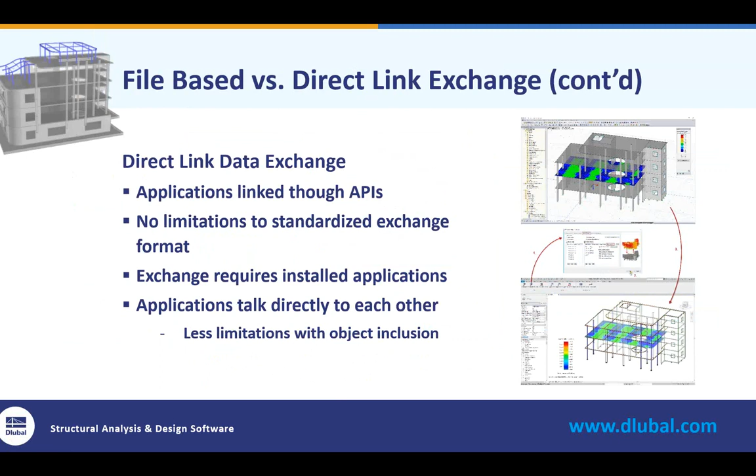With this option, the applications talk directly to each other. So with this, we're going to see a lot less limitations with object inclusion. So back to my previous example with nonlinear supports and load combinations, well, now we can just code in the option through the API interface to keep this information available. So whether we're round tripping between the programs, we'll never lose that information, even if it isn't necessarily included in the program that we're interfacing with.

So this leads us to the Dlubal Revit link and the import-export options available. So I want to first note that this does utilize direct integration with API. So again, we're going to see a lot less data loss than when we're creating a data file format. This option is included in RFEM.

So for those of you who are not familiar with our programs and how they work, we do operate with the add-on module system. So RFEM is our main program. This provides us with a full analysis. Our add-on modules are utilized for design, for example, or dynamics. Well, the import-export options with the Revit link are all included in the main program, and this is at no additional cost. The ability to integrate between the two programs is bidirectional. So we can update all or only partial of the structure and continue to cycle between both programs continuously.

You can transfer the structure objects. So we can see here from our dialog box to import export in Revit directly the ability to turn on or off these objects. We also have the ability for the transfer of loads and load combinations. So in our next tab, the structural settings, again, you see the ability to turn on and off those load cases, load combinations, result combination options.

And lastly, with regards to result sharing, we have the ability to export the RFEM results to Revit. This includes both members and surfaces. So we're going to see the information available for deformations, internal forces for those members and those surfaces, and reinforcement, for example. Now, we've had the ability to transfer reinforcement of surfaces, so whether that's walls, elevated slabs, slab on grades for concrete design from RFEM to Revit for quite some time, but we also recently added

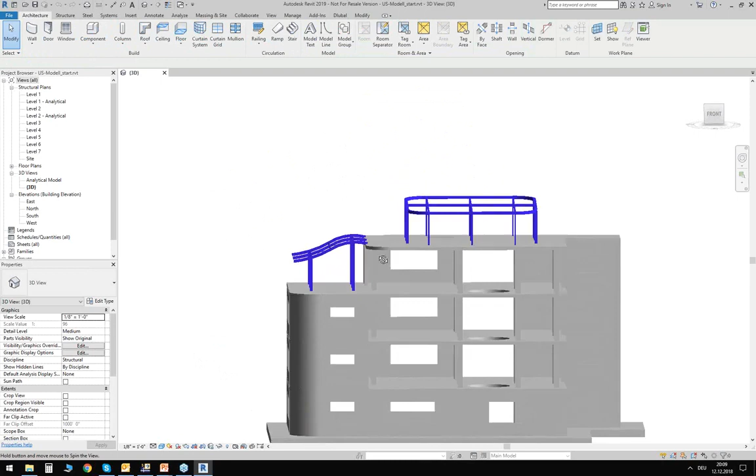Regarding the structure itself, I have here a mixed structure made of concrete and steel. I have a foundation slab. I have some walls with openings. I have curved walls, as you can see here in the corner. I have slabs with openings, concrete columns, and 2 steel constructions on top. The one on the left side has a curved roof shape, and the one on top has a sloped roof shape.

What you cannot see here right now in this Revit model, or what I did not include, is basically everything apart from the static relevant objects. So things for heating, cooling, ventilation, electrical systems, any kind of building services. You can have all those things inside the Revit model, of course. They're just not important when it's about to show the interface to RFEM. Important for the interface is the analytical model in Revit, and how you can get this analytical model I will show you now.

I think it's fair to say that what we have here is the physical model. It's the solid representation of the structural elements. So everything here is basically a solid: the foundation slab, the column is a solid, the slabs are solids.

But when it comes to the analytical model, we usually try to simplify things. So for example, the foundation slab we would usually simplify into a 2D surface, or the beams we usually consider as a 1D element. And this simplification can be done in Revit directly.

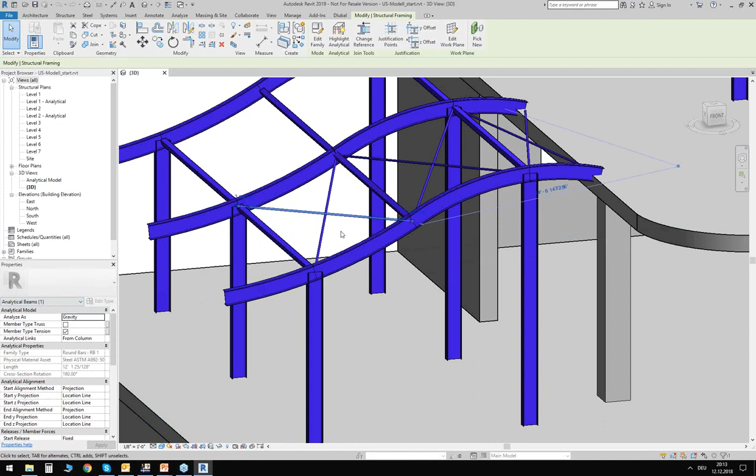So for example, we have here as well the analytical alignment of the member axis, but we also have an option to define member end releases in Revit. Additional to this, and this is now a little bit Dlubal specific, it's Dlubal parameters that I activated in advance, I have here an option to define this analytical member as a member type truss. Or for my bracing here, I can define it as a member type tension. This is information which we can exchange with RFEM or with RSTAB, and I will explain it afterwards again.

Okay, so by activating the analytical model for each of those elements, you can create the global analytical model. And this you can also, of course, see in Revit. Revit has here a predefined 3D view, which we can activate. So again, this is the analytical model. This is what we will export afterwards to RFEM. And you can see what I just mentioned: the foundation slab is now a 2D surface. Also, the members in general are now just a 1D element.

So in general, I think it's clear that when we export the analytical model, the geometry is quite clear. It's fixed, clearly defined by the length and the height of the elements. What's maybe not so clear is the exchange of information. And with information, I mean the exchange, for example, of the material names, of the cross-section names, and so on. I think in general, you can imagine that the material names in Revit may be different from the name of the material in RFEM. So how you write the name can be different.

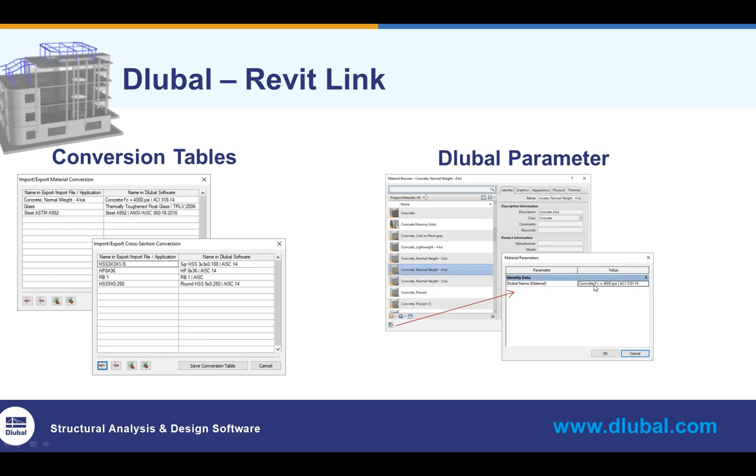The other possibility to link this information is via Dlubal parameters. So you can define directly in Revit the name of the material in Dlubal. This is also something I can show you in my Revit model here, because I actually did it that way. As I just said, I'm using this material here in my Revit model, and via these custom parameters, here in that window, I was able to enter the name of my Dlubal material. So instead of exporting this name to RFEM, we will export this name. And since this is the name of the material from the RFEM library, we will get the correct material parameters and the correct values for the design which we have to do afterwards.

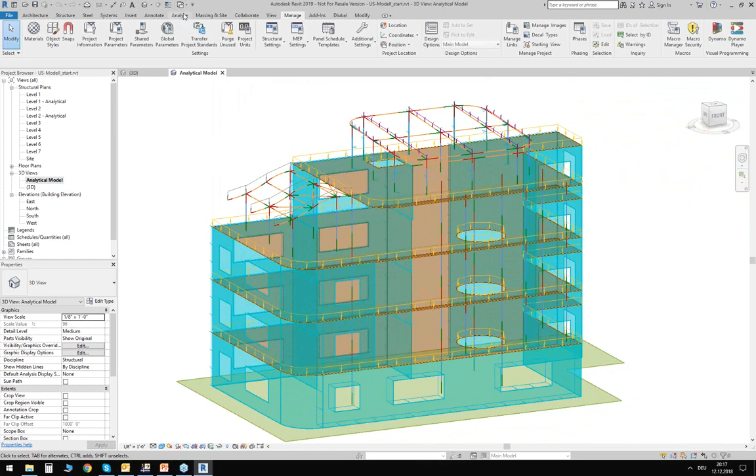Apart from that, we can also see some loads inside this analytical model. So we see here that there are some loads assigned to my members. Revit gives me the possibility to define load cases, load combinations, and even loads. You can access this information via the Analyze tab, and you can click here on the load cases, and you can see we have here 4 load cases for the dead loads, live loads, wind loads, and snow loads.

And all this information I can now export to RFEM. And I think this is something we could do right now. So how can I do it? First of all, I will show you my empty RFEM. There's nothing inside. And I can start the export from Revit.

So I have here a Dlubal tab. And I have here options to export and import between RFEM, export and import to RSTAB. And here I have some additional buttons. Here, for example, the one which we call Dlubal parameters. This is what I just explained. We have parameters for the materials, for the cross sections, for these special member types. Here you can activate these parameters in Revit, so you can access them here in these windows.

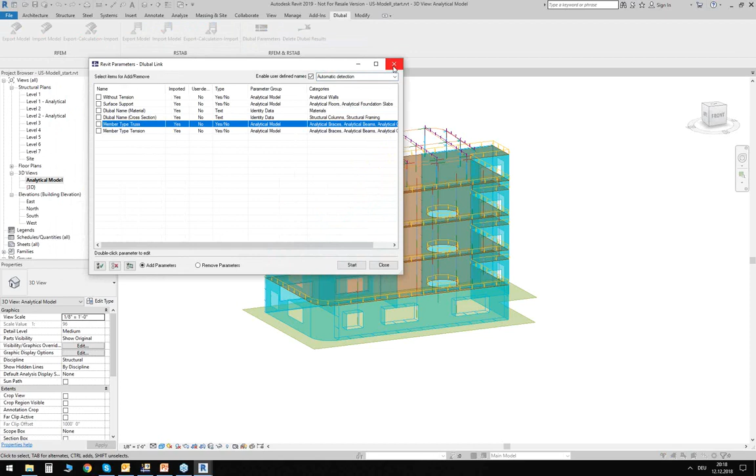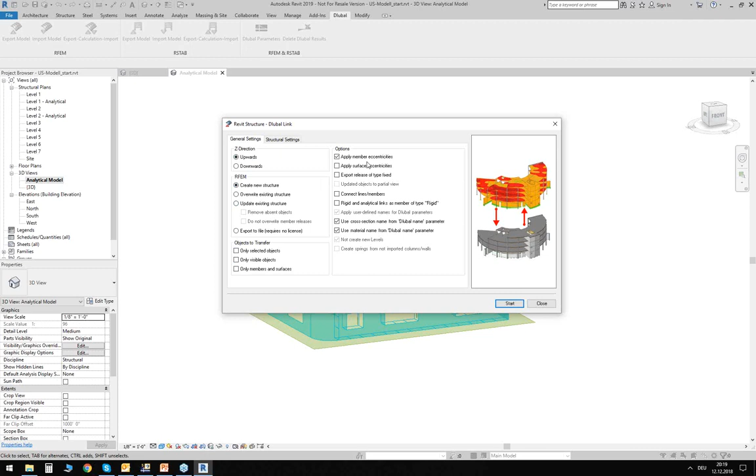So I want to export my model to RFEM. Therefore, I export this model. I can define some detailed settings for the export. I can define the Z direction of my RFEM model. It should go upwards. I want to create a new structure in RFEM. I want to apply some eccentricities that I have here inside my Revit model. And I also want to use these cross-section and material parameters that I just defined. Additional to that, I can also export my loads.

I can run the export. And you will see that it's quite quick. Yeah, the export is already done. So I can close this window. I can open RFEM again. And you can see directly that the structure we receive here on this end looks quite similar to the one in Revit.

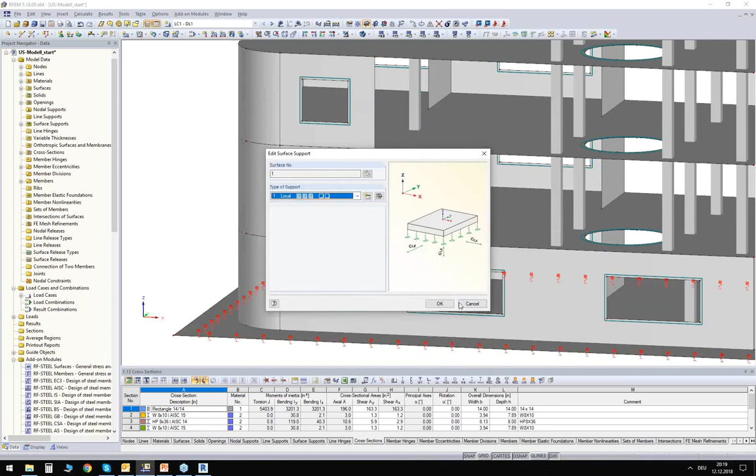We have the foundation slab as a 2D surface, of course, including some supports. We have our walls with the openings. We have this curved wall here in the corner. We have concrete columns. We have steel constructions here on top, the one on the left with the curved roof shape, the one on the top with the sloped roof shape. Yeah, looks quite good in general.

But if you exchange data, you always want to make sure that you exchanged the data correctly. So we should have a detailed look at this data. There are different ways how to do it, and I would like to show one way: by using the display navigator here on the left side. Here I have an option to render my objects according to different colors. So for example, I can render my structure according to my materials. We haven't seen any difference now because it's basically the default rendering option.

What we can see here is that every gray element is made of concrete and every blue element is made of steel. We will see an effect if I change it to rendering according to cross sections. Yeah, thank you. We see here that the cross sections are now colored, and the color represents a specific cross section. So this allows us to get a nice overview of the structure and the exported sections from Revit.

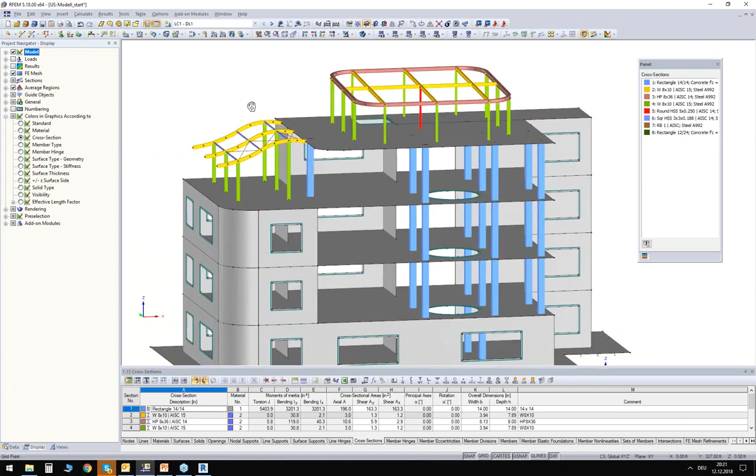We have further options here, for example, the member type. This is something I wanted to explain again. You can see here that we have different member types. We have member type beam, truss, and tension. And this is what I defined in Revit before. We said the coupling member should be a truss member. And we also said that this bracing should be a tension member.

And this is advanced information for RFEM. This basically means a truss member is a member with hinges at the beginning and the end. And a tension member is a truss member plus a nonlinearity assigned so that it fails under compression. So this is additional, advanced information that you can exchange between Revit and RFEM, or Dlubal in general.

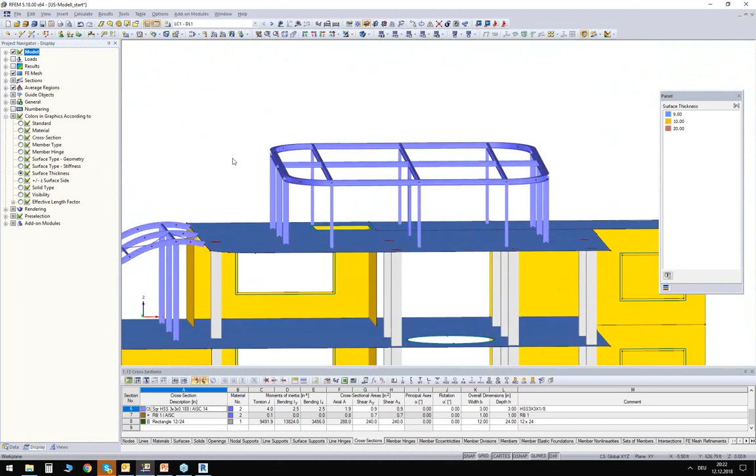Okay, there are further options, for example, the rendering according to surface thicknesses and so on. And there's one which I also want to show you. It's according to member hinges. What you can see here is now that there's no color included in this graphic. That tells me that there is no hinge included. So I have no member hinges here in this structure.

What that means is that every connection here in the steel construction is a rigid connection. And as a structural engineer, this is something you want to avoid. And of course, we can add these member hinges here in RFEM as well. So what I'm going to do now is the following. I will define one type of member hinge. In that type, I want to release the rotations around the Y and the Z axis.

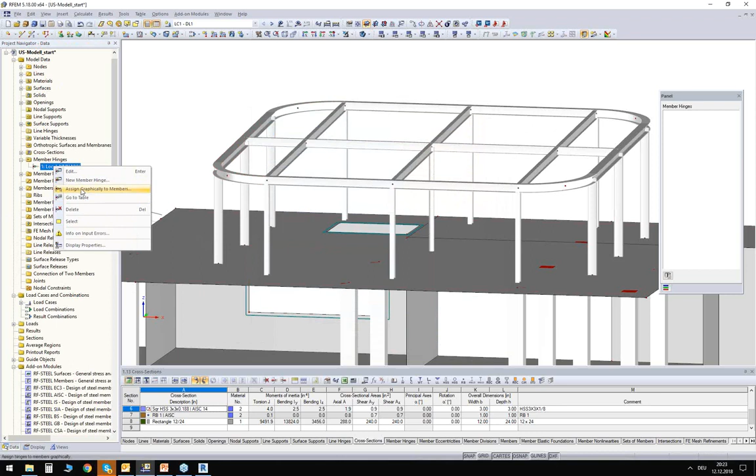And now I can assign this member hinge graphically to my RFEM model. Assign graphically to members. The only thing I have to do here right now is selecting these members. Depending if I select the end or the start or the center of the beam, I will apply this member hinge to the end, start, or on both sides. Okay, let me just double check if I did it correctly. Yeah.

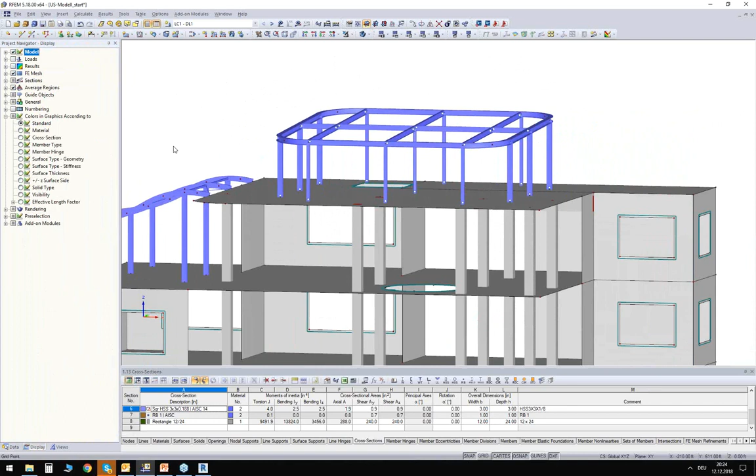I could even double check it by this graphic, which we still have activated. You can see now, I have one member hinge here, and the blue color will show me on which side of the beam I defined it. Okay. So with the display navigator, we can double check, for example, the imported data. We assume the model data is now correct. So I want to continue with my loads.

I have here 4 load cases. These are the 4 load cases I expected to have because I exported them from Revit. And I can also take a detailed look. I have some dead loads, additional dead loads. In this load case, I have some live loads here on top of the slabs. I have some wind loads and also some snow loads.

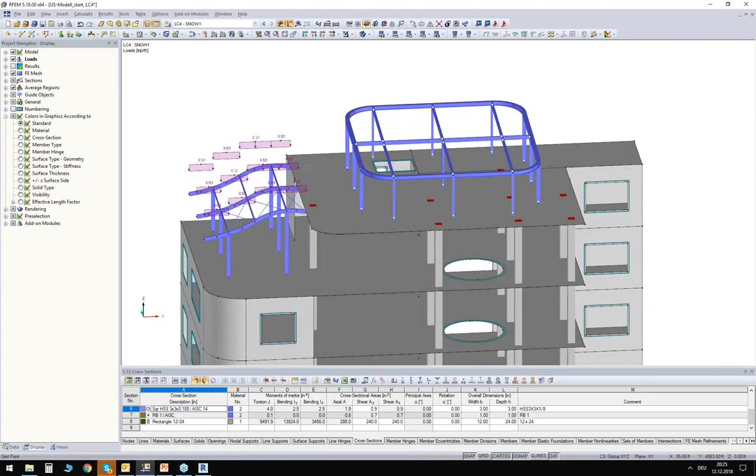I can see directly that the person who created the loads in Revit forgot the snow loads, for example, here on this steel construction. Again, this is something I can, of course, also add in RFEM. Therefore, I'm going to use a small generator. I will generate some loads from area loads on members via plane. So I'm defining the magnitude of these loads, 0.02 KSF. They should be related to the global projected area.

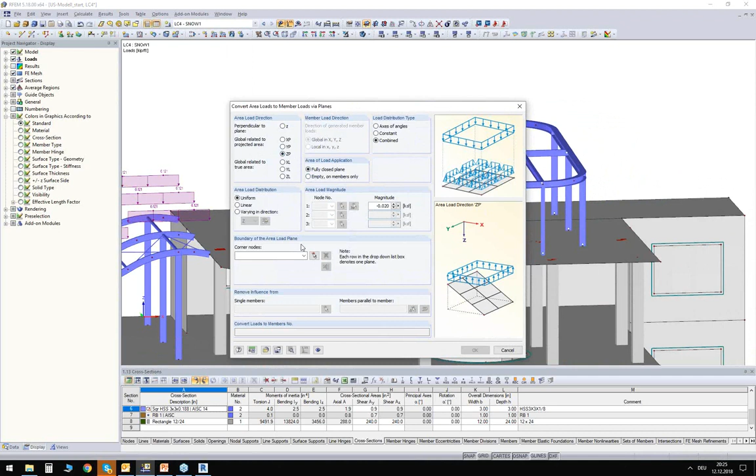And I can pick the corner nodes of my area where they should act. I will simplify it a little bit here for the presentation, just so we save a little bit of time. So I'm picking these corner nodes and I'm cutting a few edges, I know, but yeah, should be okay for now. I want to remove the influence from all horizontal members because I want the load to be applied only on the sloped beams. Okay, so this is what I receive.

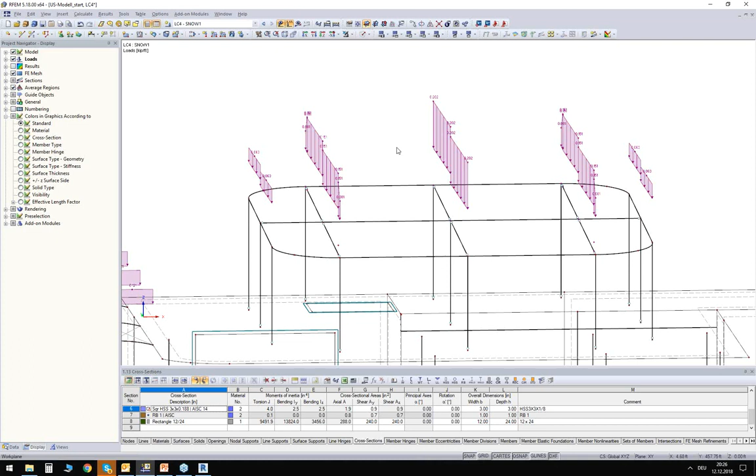After I did that, I can see my area load. I can also change the display and display it separately as member loads. The intelligence of that generated load is still active, as you can see. So it's still a generated load. And this is an advantage for something I will show you afterwards. Okay. I don't want to deal with the loads any longer. For now, it should be okay.

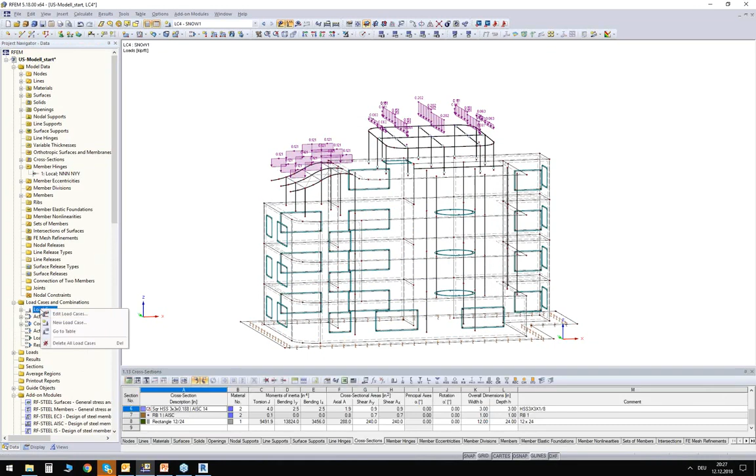So the next step would be the combination of these load cases. This is something I can do in RFEM as well. I go to my general data. I will enable the automatic combination of load cases according to the ASCE code, and create load combinations automatically. I want to control this automatic load combination a little bit. Therefore, I'm checking the related tables.

First of all, I want to make sure that the correct action category is used for every load case, which is the case here. In case we would have multiple load cases in the same action type, so in case we would have multiple wind load cases, for example, I could control here in that area that they should act simultaneously or alternatively or in groups or whatever.

Another important piece of information which we have to give to this automatic combination is according to which design situation it should create these combinations. So there is the LRFD section, the ASD section, extraordinary, structural integrity, and so on. And every design situation has its own rules for how you have to combine load cases, which you can see here. These are the rules according to the LRFD. These are the rules according to the ASD. You have different factors here and a different setup in general.

And depending on which design situations you create here, you will have additional load combinations, of course. I want to save a little bit of time, so I'm deactivating the ASD combination. I only want to have combinations according to LRFD.

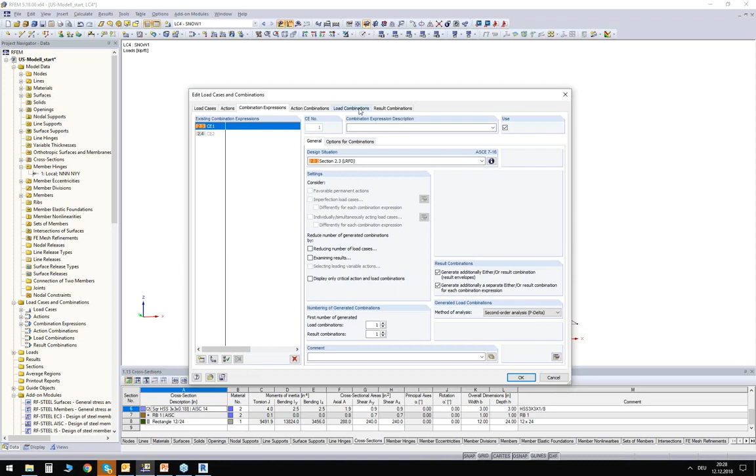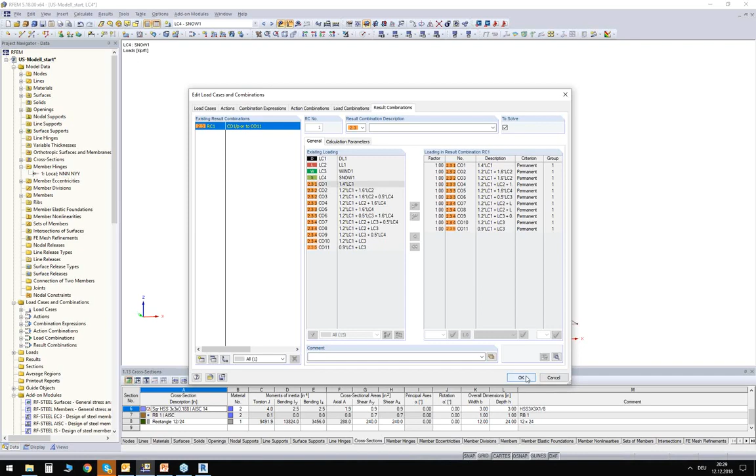I will create these combinations here. I can have a look at them again. I can see the factors, so I can control it or double check it. Additional to this, I get a result combination. A result combination is like an envelope for all load combinations. If you take a look at the results of a result combination, it will show you the maximum and the minimum and its related internal forces. Okay. You can switch between the load combinations via this drop-down menu.

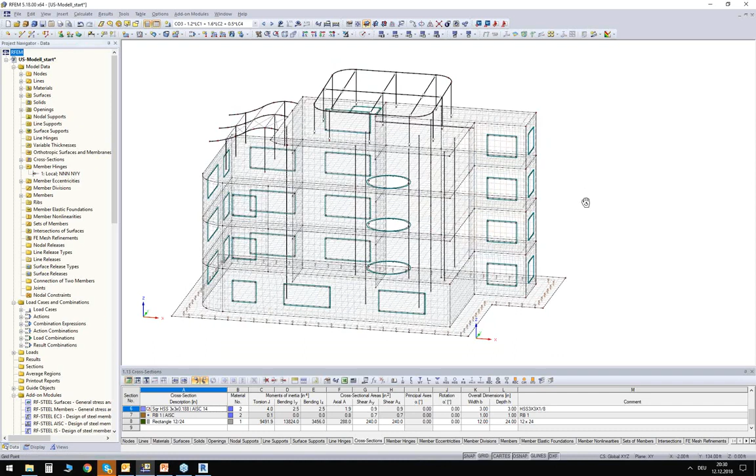So before we run the calculation, we should have at least a rough look at the finite element mesh. It's a finite element analysis here, so the finite element mesh has a huge effect. So what I will do is I go to my FE mesh settings and I will only define the target length of my finite elements. This is the most important information for now. I will regenerate the mesh and I can see the finite element mesh now.

In general, you could say it looks quite good. It's decent. There are some areas where it's maybe not so optimal. For example, here on the right side, where I have these openings, the windows inside, I have just two elements between the edge and the opening. This is not enough elements. So I want to optimize that area. Let's say just this area here. How can I do this?

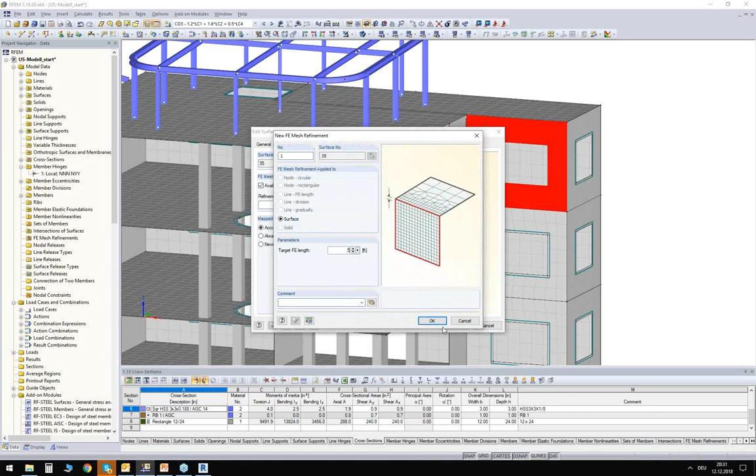I just double click on the surface. I can go to my FE mesh tab and activate a FE mesh refinement. The only info I have to give here is the target length of my finite elements in that area, maybe 0.5 foot. I accept and optimize that also on lines or on nodes. I will do it also for the node here. So around this node, I want to have an FE mesh refinement. I go to the tab, I activate the FE mesh refinement, and I can define additional information about the radius and the target length inside.

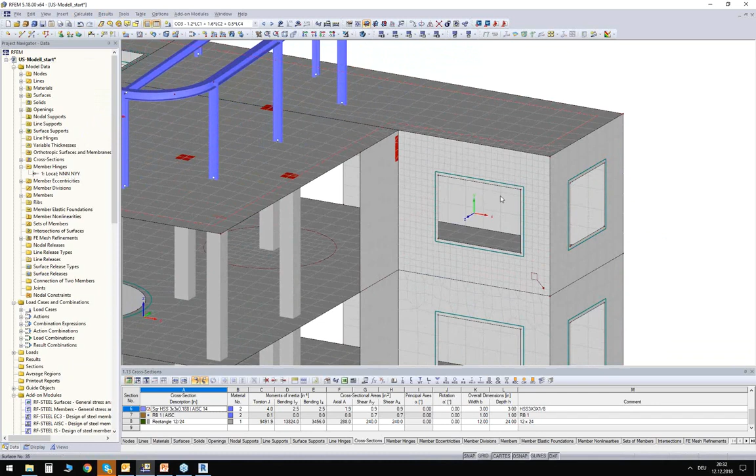Okay, we assume we optimized the FE mesh of the structure for every section. I will skip it here right now, and we regenerate the FE mesh. You can clearly see the effect now. So this is the global FE mesh. This is the refined FE mesh. You can see the effect as well here around the column. It was quite easy to change that.

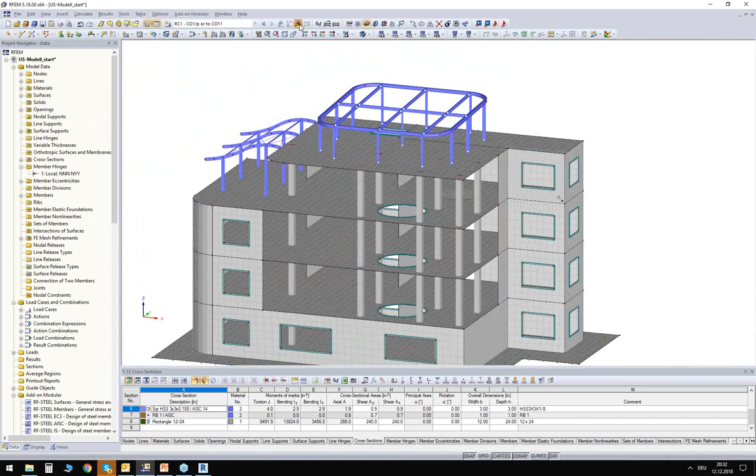Okay. So the next step is the calculation of the internal forces. I will do it by selecting my result combination here, and I will say, please show me the results of this result combination. I could have also done it in a different way. I could have clicked on the button calculate everything. But what does it mean? It will calculate also the results of my load cases. But I'm not really interested in the display of internal forces of my wind load case where there is no self-weight acting. So to save a little bit of time, I just clicked on the results of this result combination, and the program is intelligent enough to calculate only the required load combinations.

Okay, we will see the results in a few seconds. And then we can continue with the design of the structure. For some reason, it takes a little bit longer than when I prepared it, but that's okay. Okay, the calculation finished, we will see the results in a second.

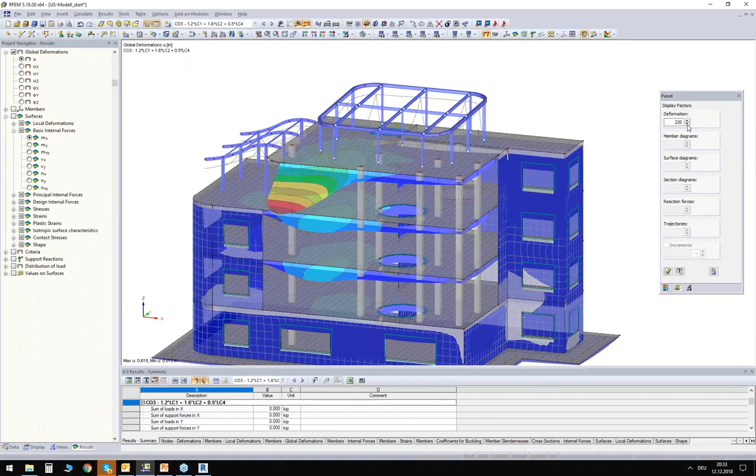And I can switch now again between my combinations and display for each combination my result. Let me decrease a little bit the display factor, otherwise it looks like the structure is failing. On the left side, I have my result navigator now. I can switch between deformations or member internal forces. So for example, you can see really nicely that the axial force in the columns will be increased every time it intersects with a slab, of course.

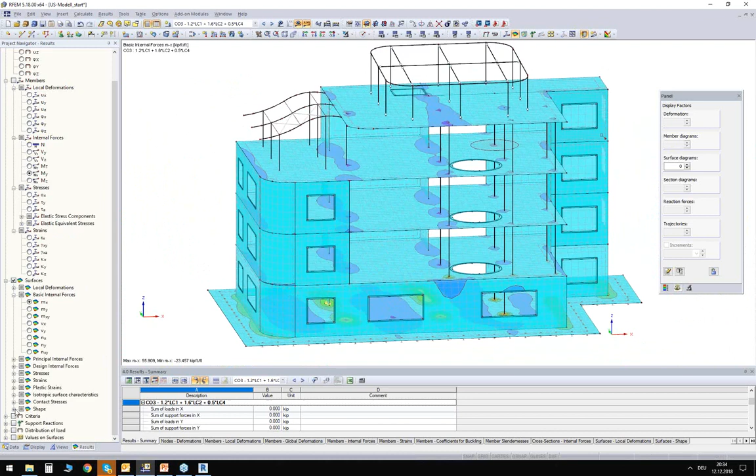I can also display some bending moments, maybe to double check if the hinges I defined work correctly. I can, of course, also take a look at the results in my surfaces, maybe some bending moments in my surfaces, or even the contact stresses on the foundation plate on the bottom.

With the calculation of these internal forces, we are not done, we have to design the structure. That means we have to do additional checks, stability checks, stress checks, and so on. And these additional checks can be done in additional modules. I want to go over this topic rather quickly because Amy has some really nice webinars where she explains the most common modules in detail.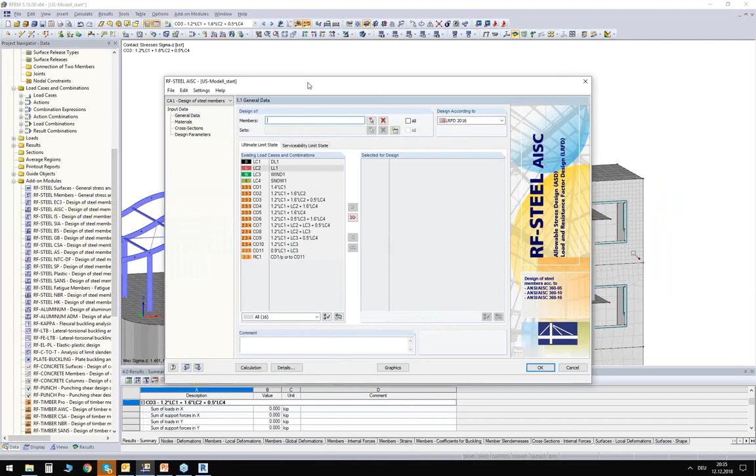So one module which I want to show is the module RF-STEEL AISC. It's for the design of steel members, and this is what I'm going to call up now. You will notice that every module looks more or less familiar. So if you can handle one module, you most likely can also handle the other modules in general. So I have to select the members that I want to design. I only want to design this beam and this column, for example. You can pick the code you want to design according to, and also the result combination.

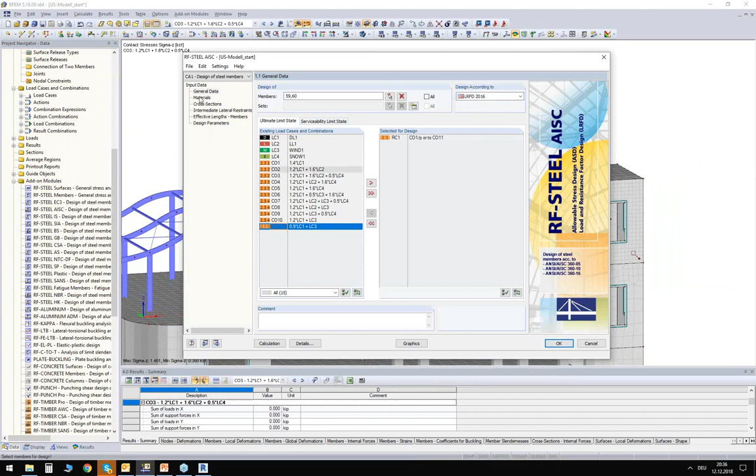You have now additional windows that you can go through. Some of them are just to give you an overview about certain properties for materials or cross sections. Other windows deal with the stability checks of the beams. So for example, you can define intermediate lateral restraints, the buckling lengths, and so on, or the design parameters. I will leave those values on default.

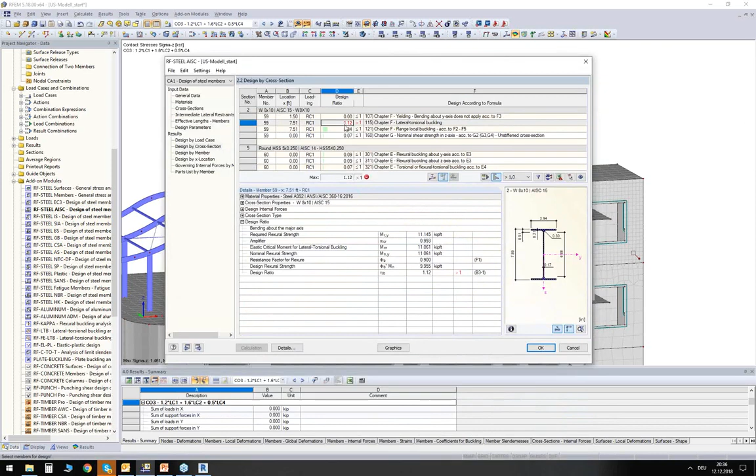So I will run the calculation and I switch into my result table design by cross section. What I see here is, for each cross section that I designed, the maximum checks. And I notice directly that the W section for the beam has a design ratio of about 1.12. So it's higher than 1, which is not good. On the other hand, the design ratio of my column is not even at 10%. So I have to optimize both cross sections somehow, and I can do it the following way.

I can go to my cross section window again, and I could, for example, let the module optimize the pipe section automatically from the current row. Current row basically means it will look for the best section in this list here. And with the best section, I mean the section where the design ratio is smaller than 1. And the criterion for this optimization is actually the self-weight of this section.

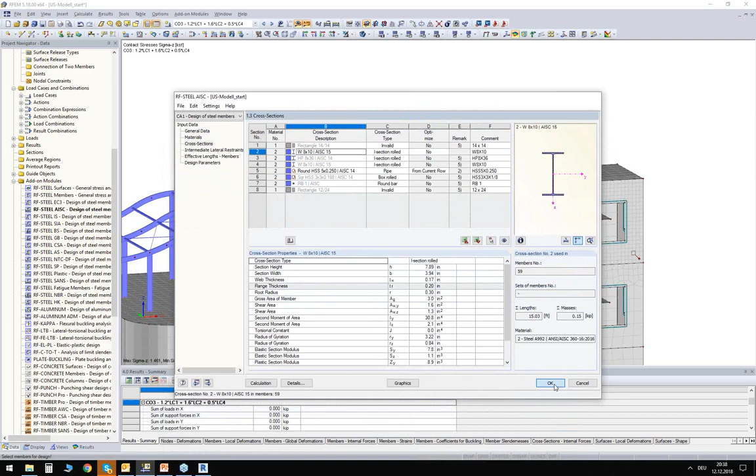Okay, wait, I made a small mistake, sorry. Import cross-section from RFEM, I changed it, which I didn't want to. I want to optimize the cross-section, and I could in general do the same for the W section, but due to constructive reasons, I'm not able to change the section. So what I'm going to do is apply additional beams in my roof. I just select the beams, and I use drag and drop to copy them. It's like a graphical tool to copy beams, and it's really quick and easy.

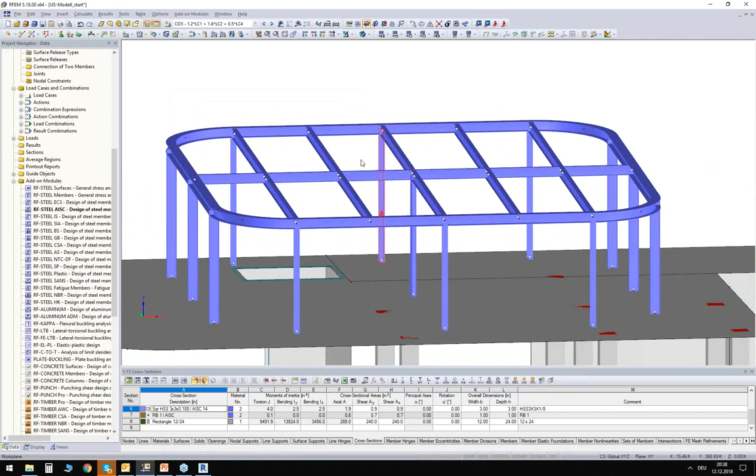And by defining additional beams, I will spread the load. And this is something I want to show. If you remember, we defined this generated load where we defined the area where it should act on and so on. And this load is so intelligent that it recognizes these new members, and it will redistribute the area load to all slope beams now. And this basically means that the load on the beam we design will be reduced.

So I go back to my module, and I rerun the design. For the pipe section, I'm using an automatic optimization, and for this section, I optimize the analytical structure in the background. I click on calculate again. And of course, I have to recalculate the internal forces simply because I changed the analytical model in the background. I added additional beams, I redistributed my loads, so I have to rerun the analysis.

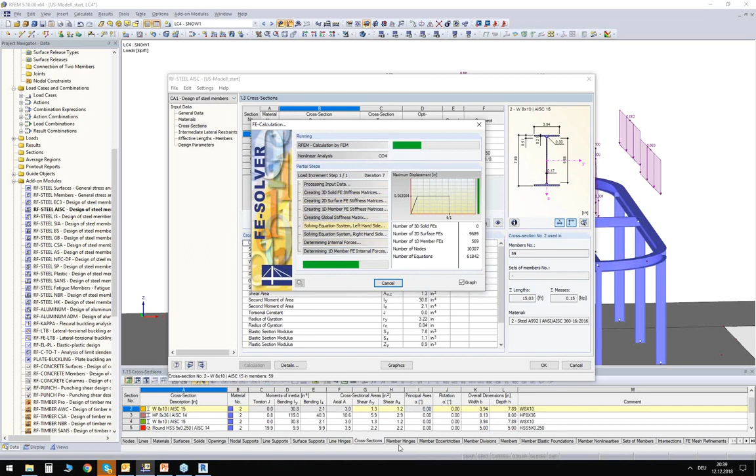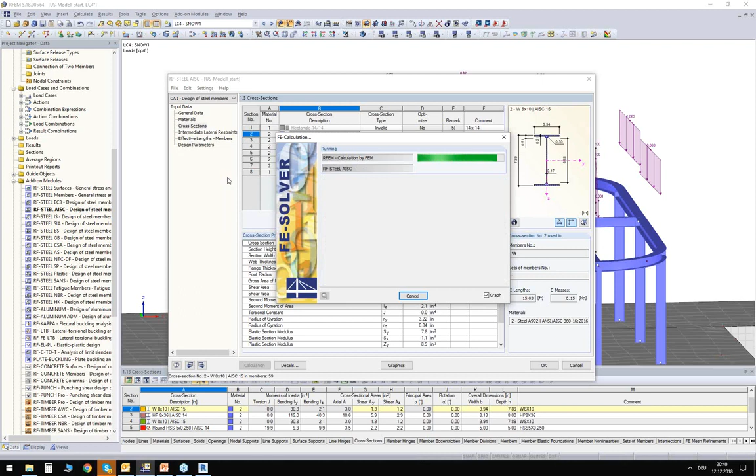Okay, this should be the last one. We will see our result tables again. And in these result tables, we will see now that the design ratio of the W section is at 66%, which is fine. And the design ratio of my pipe section is at 94%, which is also fine.

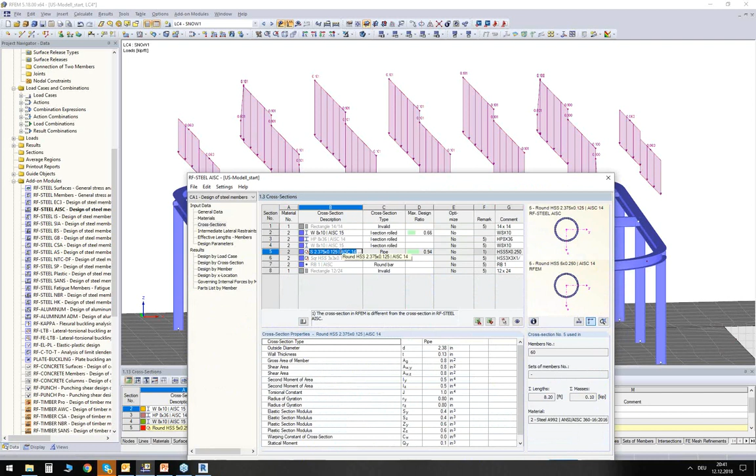So to make it 100% perfect, we would actually have to redesign everything, because the design of this optimized pipe section has been done with the internal forces of my original structure. So what I would have to do is export this optimized cross section back to RFEM, recalculate my internal forces, and with these probably slightly different internal forces, I can rerun the design. I will skip this check right now, or this loop.

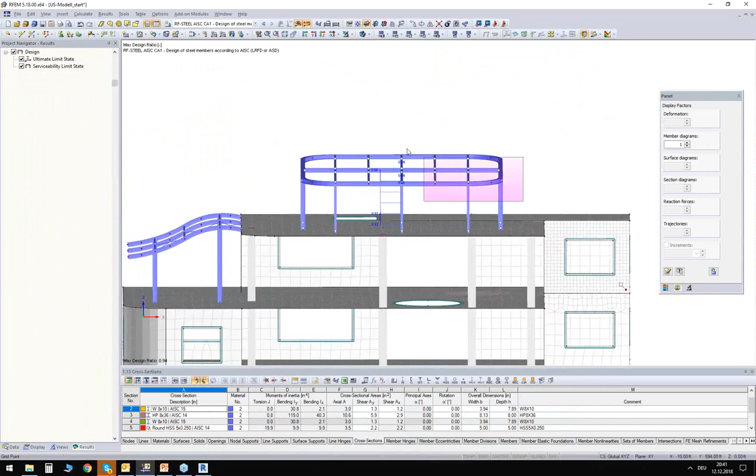Of course, we are able to display the design ratios also graphically. I think this is no big question. Okay, so we just changed a lot of stuff in that top steel construction here. We added hinges, we changed the amount of beams, and this is maybe something which you would like to give back to the Revit model. So you want to update the Revit model with this information, and the way you can do it is the following.

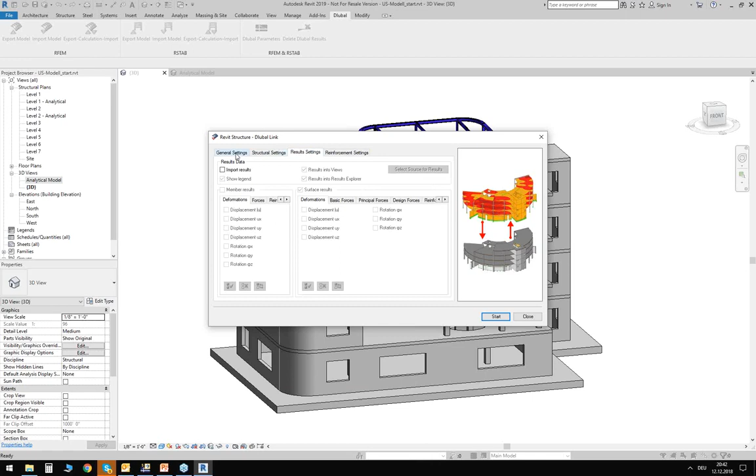You go back to Revit and you run the import from RFEM. You update the existing structure. I don't want to consider any eccentricities right now. I want to apply loads, that is okay. And I don't want to import any results right now. Just update the physical model. So I can start the import and you can have a look at this area here.

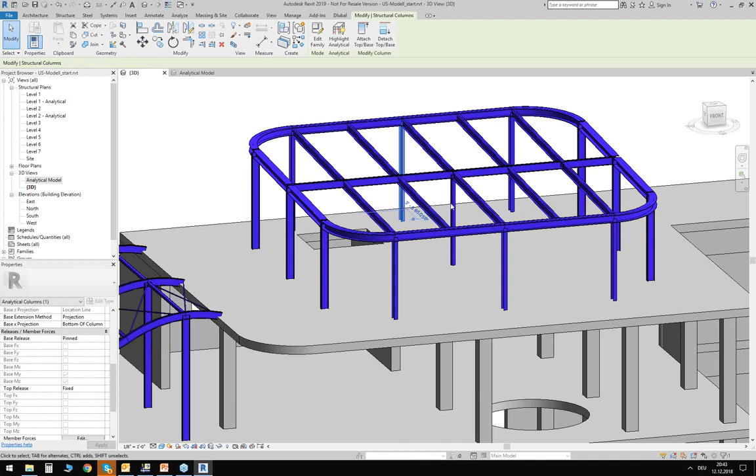Okay, so first of all, we get a message about an unsupported combination criterion. Basically, Revit tells me here that it cannot handle result combinations. It's not a big deal here. Important is that we have now these additional beams in the roof. And we also have updated information in the analytical model. You can see here in the properties that we have now also information about the hinges on the bottom of this column and also in the beams. So we were able to update the analytical model in Revit, and we were also able to update the physical model. We added new beams here.

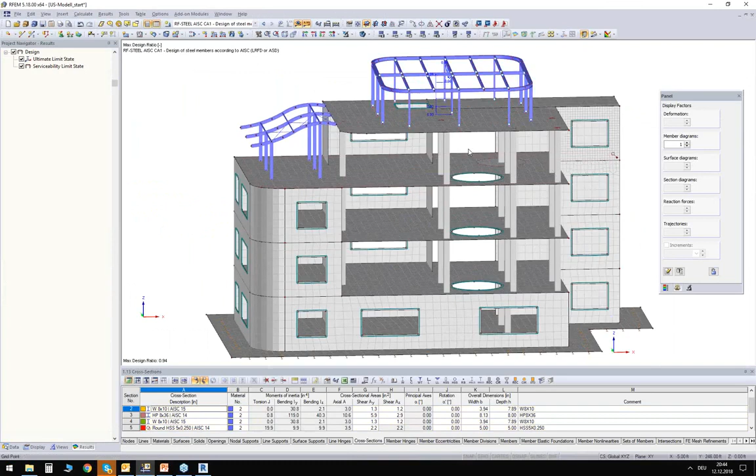Okay. The next thing that I want to show you is the design of some concrete elements. I want to design the columns, and also there's a beam inside, which I didn't show you before. I want to design these elements in RFEM and also export this result into Revit. So I go back to RFEM, and to design these concrete elements, I need a different module. This module is called RF Concrete Members.

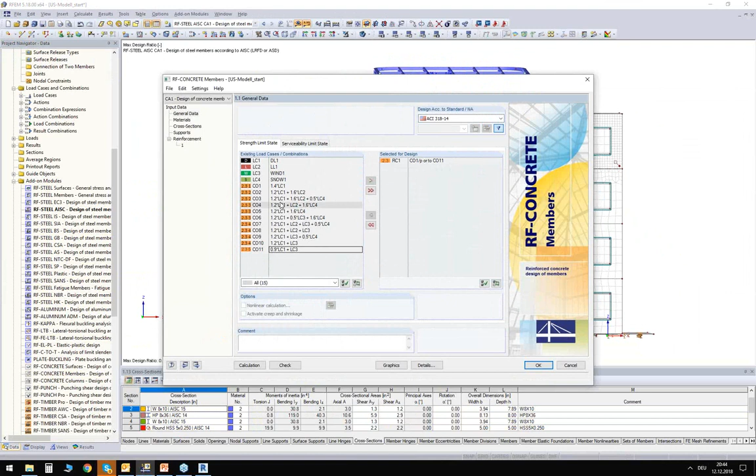And it looks familiar. You simply have to choose the code you want to design the concrete members according to, and the load combination again, or the result combination in this case. And then you have again additional windows for the material, for the cross section, reinforcement layout windows, so which possible rebar you want to use, stirrups, the concrete cover, and so on. Again, Amy has some nice webinars about this module, which you can take a look at.

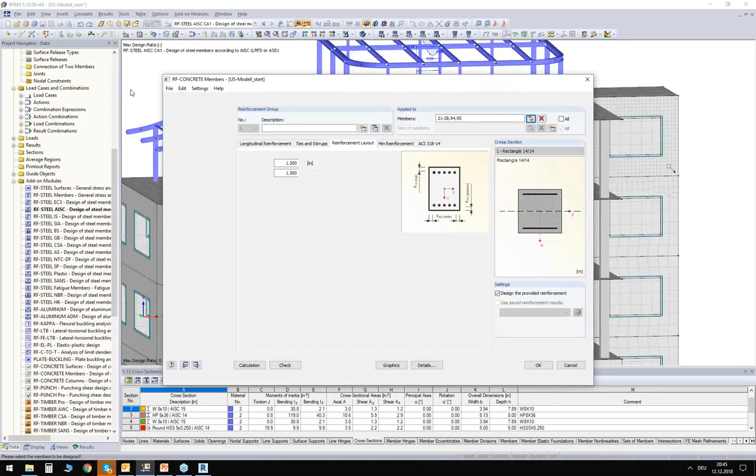The only thing which I want to change here is the members I want to design. So I'm selecting here all the columns from the highest concrete level and also the beams here in the background. Okay, I will run the calculation. Since I already have the results from my result combination, I only have to do the design of the beams, and it's quite quick. So I get now additional tables for my results. I have here information about the required reinforcements on the top and bottom layer of the section, for the shear, and so on.

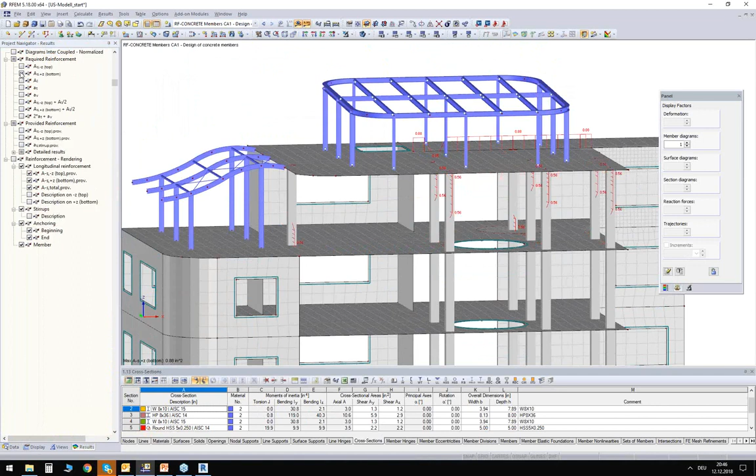And this module also gives me a provided reinforcement. So here I have some nice drawings, and I can also display this provided reinforcement in my RFEM structure. I can choose here the concrete case, display the results, and enable the reinforcement rendering. So I will zoom in a little bit, and you can see I display here now the rebars inside my concrete column.

And this is also working for beams, of course. Here you can see the stirrups and the longitudinal rebars in the beam, including the hooks. And this is also information you can export. This is quite a new feature. So I can go back to Revit.

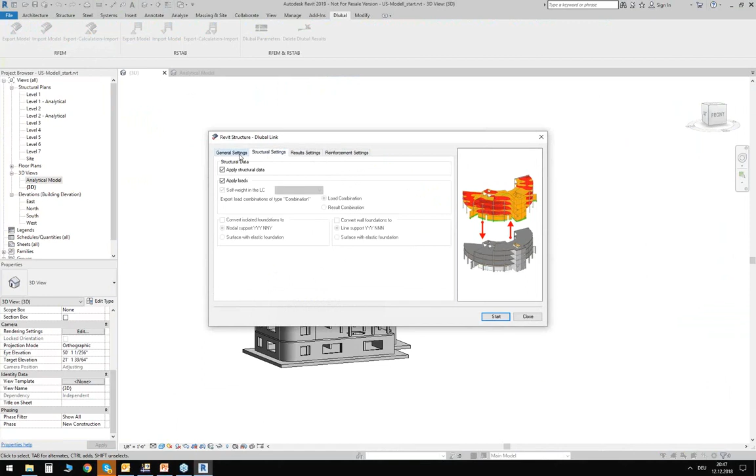I can import the model or import the results from RFEM. I will take a look at the settings here right now. So I'm not interested in results. I'm interested in reinforcement settings. I want to import the reinforcement, not from surfaces, but from members, because I designed members here. And I can run the import.

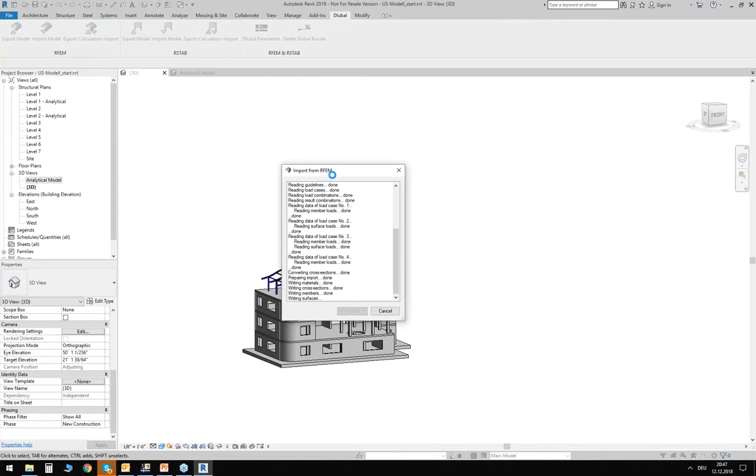So this is again the log basically, which it will show us. And after the import, we do get, okay, the same message again. I don't care here in that moment. But we also get a new 3D view, and this is called 3D reinforcements. And by default, the reinforcements will be displayed as a wireframe model.

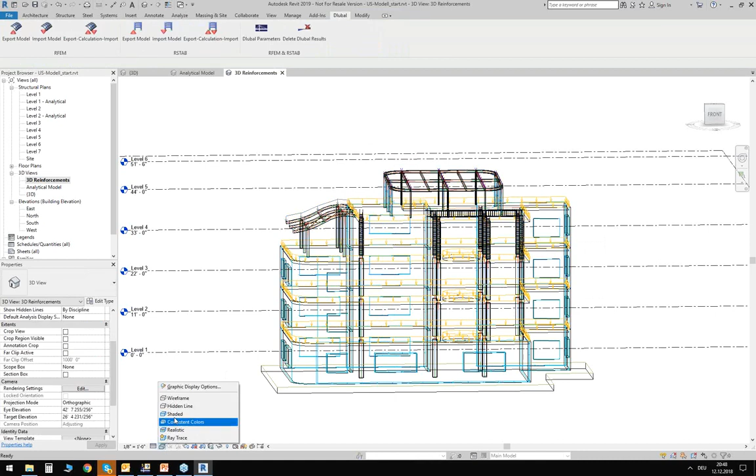If you switch a few visibility settings in Revit, so for example, you have to change the visibility for the rebars in that specific view as unobscured object and view as solid. And then you can also change a little bit the display of the structure. You will see the rebars also in a nice solid model here in Revit. So you can see again the stirrups, you can see the longitudinal rebars in the columns, and also in your beam.

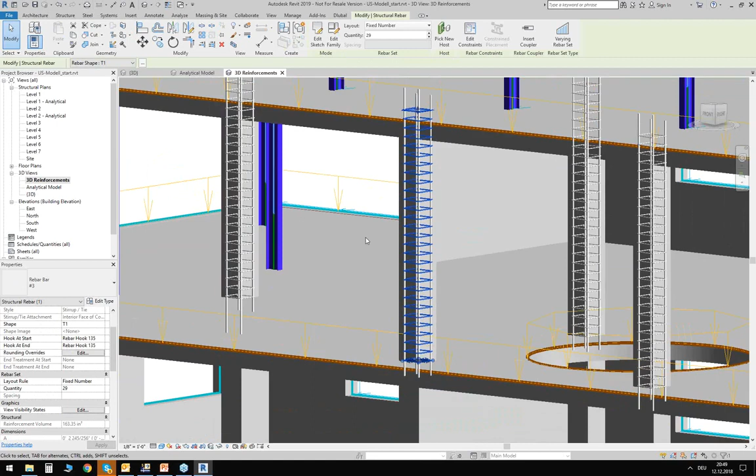And these are not simply graphical objects. This is actually a rebar. So if you click on this object, on the stirrups for the column, for example, you could change now the shape of the stirrup. You can change the hooks. You can change the quantity of stirrups in that column, and so on. So it's an actual object you can work with. Okay.

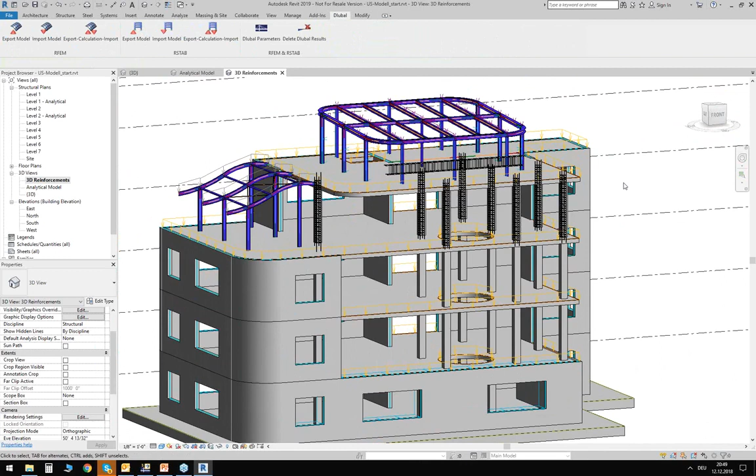This would be the first scenario that I wanted to show you. So the exchange between RFEM and Revit using the global model, so the complete analytical model. And you could theoretically continue here. You could change or update or add additional things in Revit. You can update the RFEM model. You can design again the RFEM model and export these newly found results or anything else back to Revit. So back and forth, and this is what Amy said, it's a bidirectional interface.

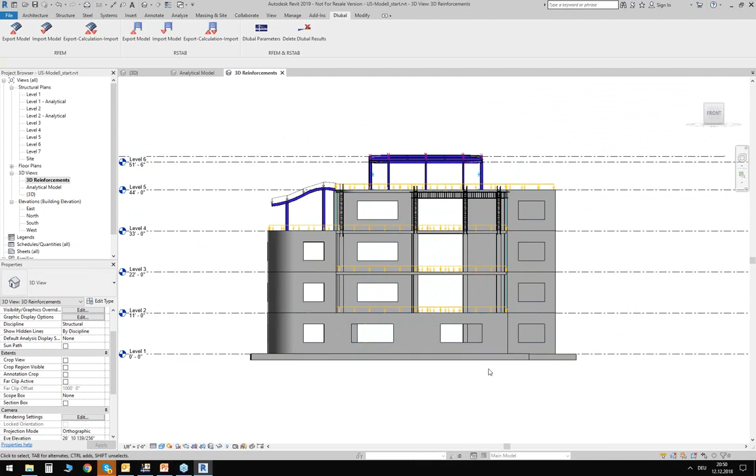But not in every situation you want to export the complete analytical model. It's not always required, and not every engineer actually wants to work with big 3D models. Some prefer to work with smaller models, or they want to design it level by level, for example. And this is something I would also like to show you. You can export partial models from Revit to RFEM. And I did it in advance for this small structure here on top, for the steel structure. I can show you.

So I have here this pavilion. It came from Revit, and I calculated and designed it, and I have some support forces down here. And now I want to do it for the concrete structure below. So I would like to do it basically for the following elements. So for the concrete walls, for the concrete slab, and the concrete columns in that level.

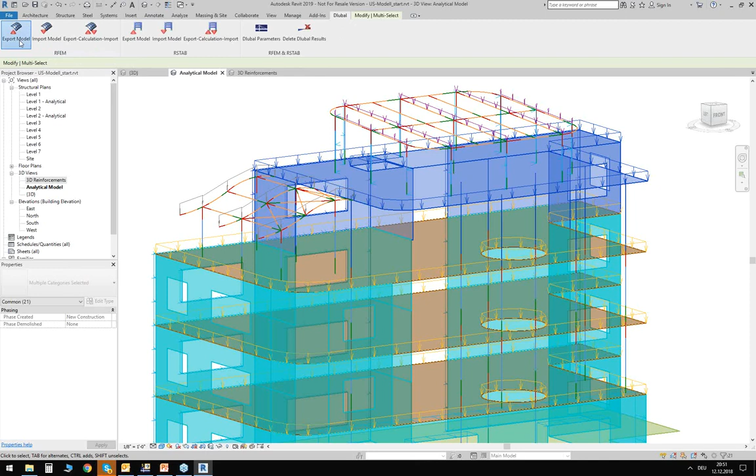So I select those objects here in Revit. I go back to my Dlubal tab and I say export model. I can create a new structure in RFEM, and I export only the selected objects. You can also do it via visibilities. I prefer here selected objects. I want to apply my member eccentricities, use my Dlubal parameters again, and also apply the loads. So I run the export.

It's done. I can go back to RFEM. You can see here this partial model from Revit. So just the concrete elements from the top floor. And you can work with this, of course. You can support the columns with nodal supports. You can assign line supports onto the walls.

And we also imported the load cases from Revit. So we have here the live loads on top of the slab. We have some wind loads and so on. But we do miss now the loads from the structure which we have on top, you know, the pavilion, the support forces. But there is a nice tool in RFEM, and you can call it up via the tools menu, and you can import support reactions as loads.

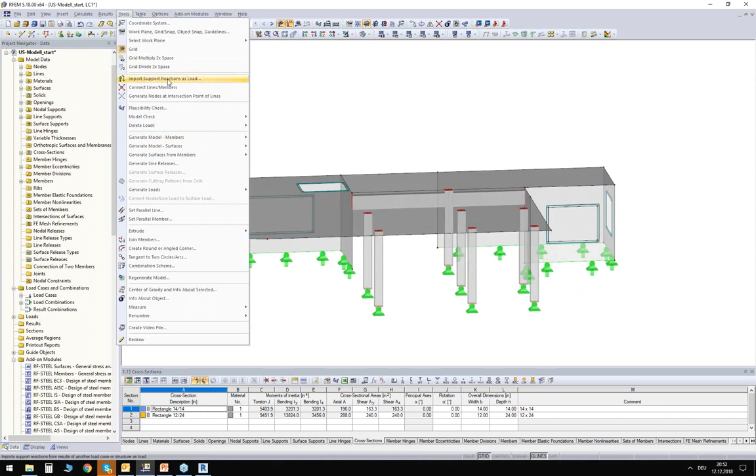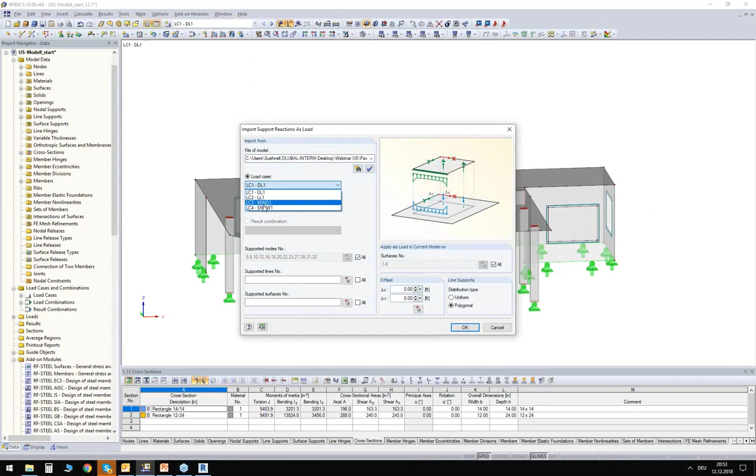So I will click on this option. I can choose here the file, the pavilion that I designed before. I can say, please import the support reactions from all supported nodes from any load case that I calculated in there, for example, load case 1, and please place these loads on top of my slab.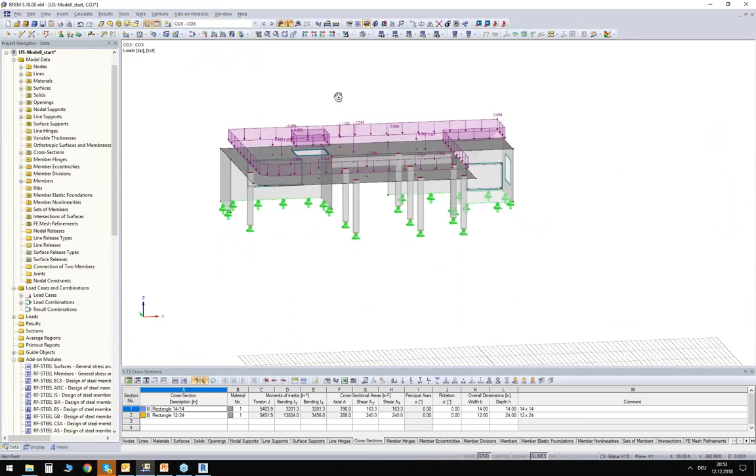And since we imported also the load combinations already, we can use it and redesign the structure. Maybe I can show that quickly. For the slab here, I can call up the module which is called RF-CONCRETE Surfaces, so to design concrete surfaces such as the slab or the wall. Again, it looks familiar more or less.

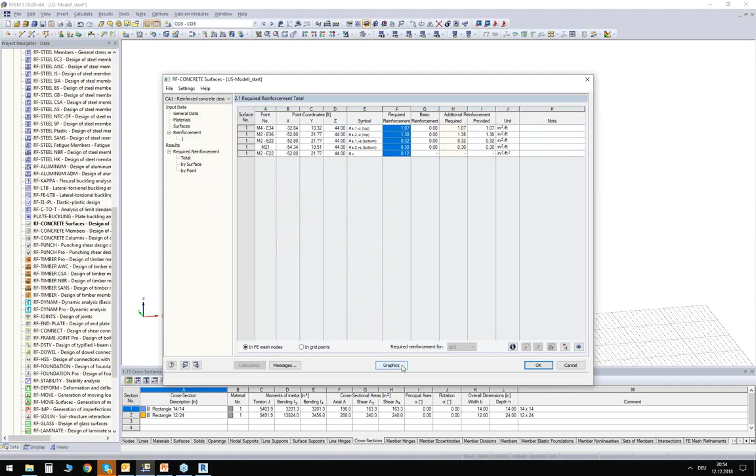I will use here just the combination 3 now, according to the ACI standard. I will tell this module, please design me now only this concrete surface here, the concrete slab, and calculate the required reinforcements for this. This is what it will do now. I get now result tables with required reinforcements information, and I can display this also graphically, of course.

So in my result navigator, I can display now the reinforcements on top, which is now higher in the area of my columns, or the reinforcements on the bottom, which is of course higher between my supported nodes. And these results I can also export back into my Revit model. So what I can do now is I can go back to Revit.

I can import results. Let me just check a few settings here. So I want to import now result values from my concrete case. No reinforcements, because we didn't calculate any reinforcements there. We calculated required reinforcement values. So I import these values.

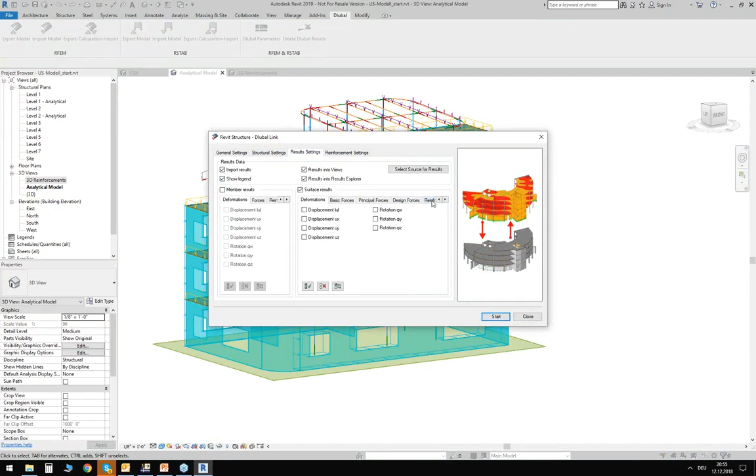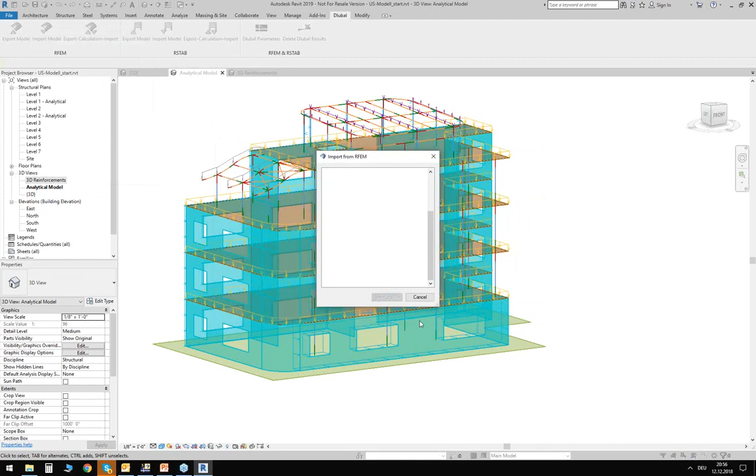I can click here on results from surfaces. Maybe all these results I want to import from the required reinforcement, and I can choose the source I want to import it from, which is this concrete case I just defined. Okay. I run the import. And what I will get afterwards is I will get a new 3D view here on the left-hand side.

And as you can see, I imported now the values from my RFEM model, including this navigator here on the right, this color scheme on the right. I can even switch between my results, because this is now just the reinforcements on top in the slab. But via a result explorer, I can even switch between my results in that view.

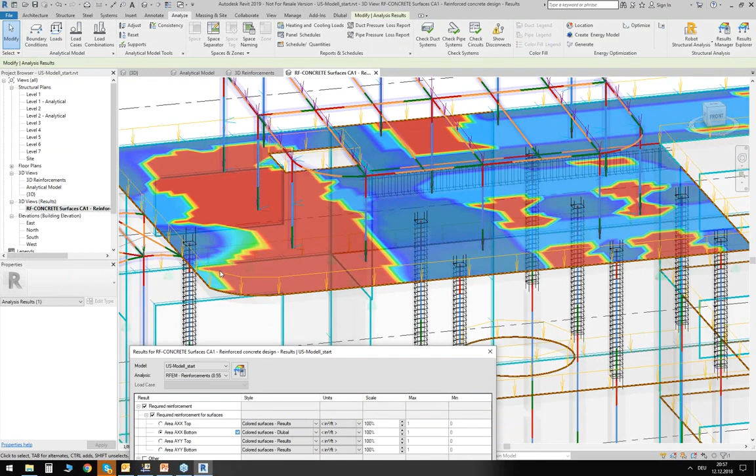So I can say, please display me also the reinforcement in the bottom of my surface. If I click on apply, this view will update, and I can see the bottom reinforcements in my slab. So this is something that we just saw in RFEM before, right? So we can not only import here the rebars, we can also import result values from concrete modules, from internal forces, and so on.

Okay, so this was the second scenario that I wanted to show you, that you can work with partial models. You can extract partial models and also update again the global model in Revit. And the last scenario, which is even shorter to explain, is the following.

I will close every model that I have here in Revit. So there's no model open. I will also close a few models which I have here. So this one and the pavilion as well. So it should only remain this global model that I imported before. And I can do also the following.

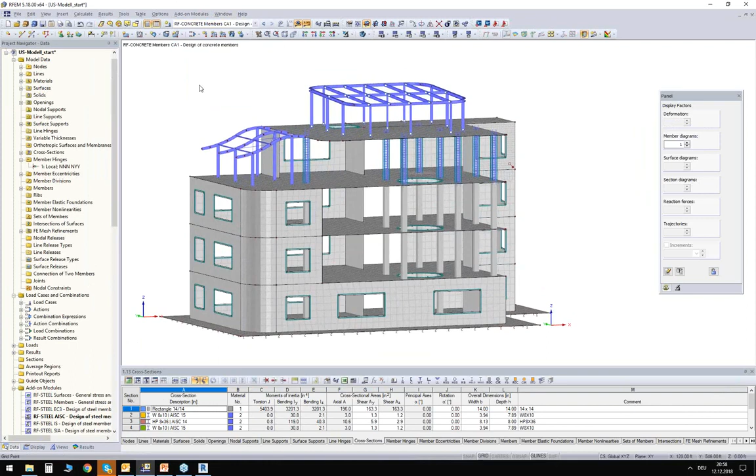Imagine there's a structural engineer who designed this mixed structure here, and there's an architect who has to create some drawings in Revit, and he's now asking for any information the structural engineer can give him about the structure. And the big benefit of this interface is that you can also export the analytical model in RFEM to Revit. So you can do it the following way.

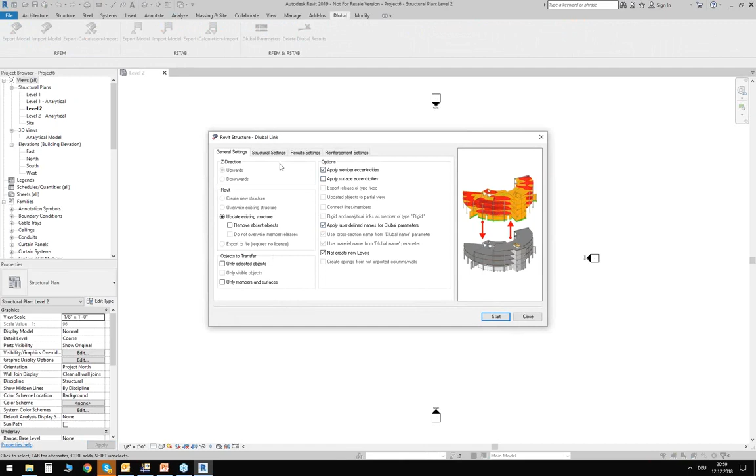You create a new model in Revit. You pick any template you have here, and you can go to the Dlubal tab, and you do more or less what we just did before. We import the model from RFEM, and we apply member eccentricities. I skipped the loads. We could also import the loads, but I'm not doing it right now here. Try to keep it simple, and I can run the import.

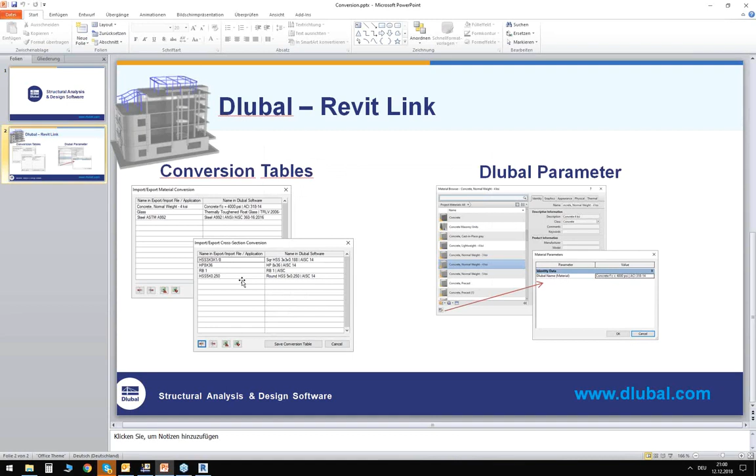And then the following could happen. It could be that Revit is asking you if you could assign a Revit type for this type of section here. So there's a column in RFEM, a round hollow core column, a pipe section, where Revit doesn't know how to deal with it. Now you could think we defined these conversion tables, and there is actually the information inside. The Dlubal cross-section round, HSS, and so on, should be the following section in Revit.

But this message here is actually a completely different issue. The issue here is that the template that I used has no information about the family for this section. So Revit is a family-based software. You have to create families for sections and for any element that you want to model. And if this family is not loaded in this project, then we cannot link between these two elements, between RFEM and Revit.

So what you would have to do in this case, you would have to load this cross-section from the Revit library. And you can do this the following way. You click here on that arrow, you go to load family types. Then you can download some libraries from Revit, from Autodesk directly. For example, the US Imperial libraries for structural columns made of steel. And here you will find this pipe section that we are looking for.

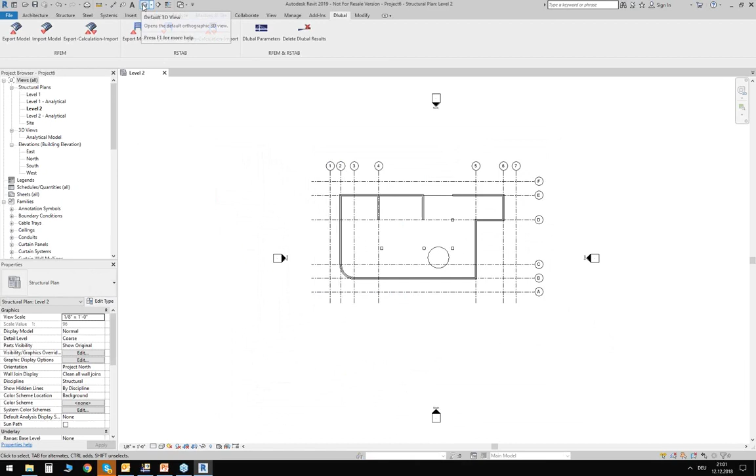5 times 0.25. Wait, I'm too high. This section here, I can load it, and then I can apply this section. The import is running now. It's still running, by the way. Okay, import succeeded. I can close this window, and I can take a look at my 3D view in Revit. Maybe change the visibility mode here into the shaded mode.

And you can see we were able to import a structure which looks quite good. And we have here the sloped roof, we have the openings here everywhere, and so on. So we were able to import a physical model from the analytical model in RFEM. Of course, we were also able to import the analytical model as well. But the big benefit is that we get the physical model in Revit. And this is now something the architect can work on.

He can adapt it. He can maybe even export it into different formats to exchange it again via IFC, via STEP, whatsoever. So it's really a big benefit, this third scenario, that you can create models in Revit from the data in RFEM. So this was most likely the content that I wanted to show you. I hope I was able to show you some new features or some interesting features.

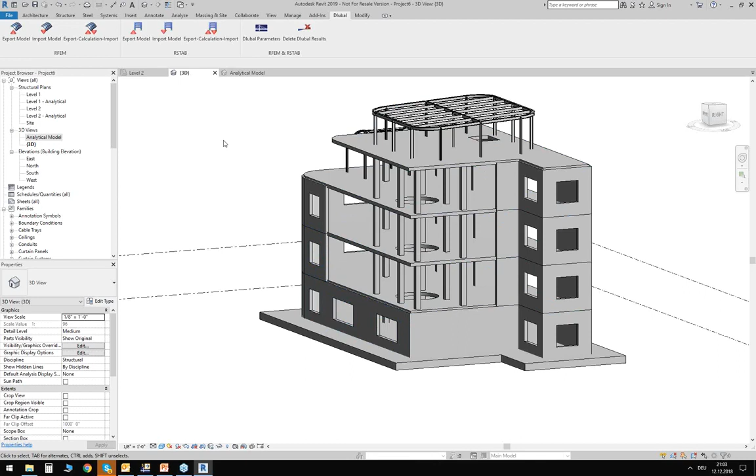And basically you can take back the screen, Amy. Perfect. Thank you, Lucas, for that informative example. As always, we know that was quite a bit of information.